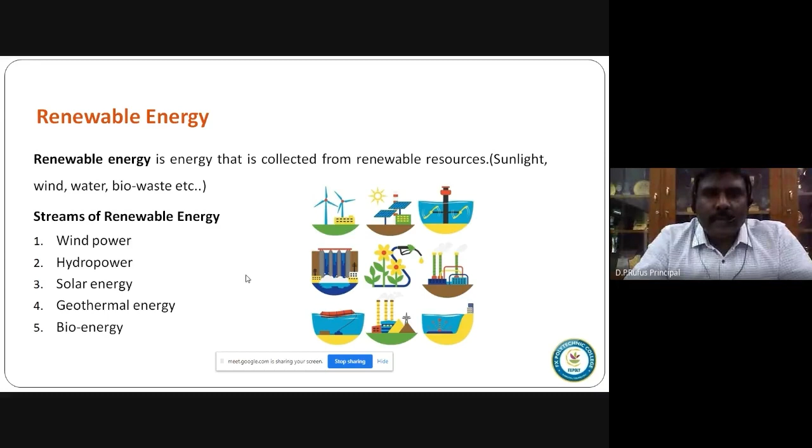Now you may have a question: what is biogas? Biogas is naturally produced from the decomposition of organic waste by the biological breakdown of the organic matter. What are the bio wastes? Food scraps, animal waste, dairy waste, sewage water, and many other wastes. So when we break down the organic matter of the biowaste, we can get the biogas.

So now we can move on to raw biogas. What are the things available in the biogas? Number one, 55 to 65 percent methane. You can find 55 to 65 percent methane in the raw biogas, and also 30 to 45 percent carbon dioxide, and also some traces of hydrogen sulfide and some fractions of water vapor. Pure methane has a calorific value of 9,100 kilocalories per cubic meter. So this is the biogas, and now the uses of biogas.

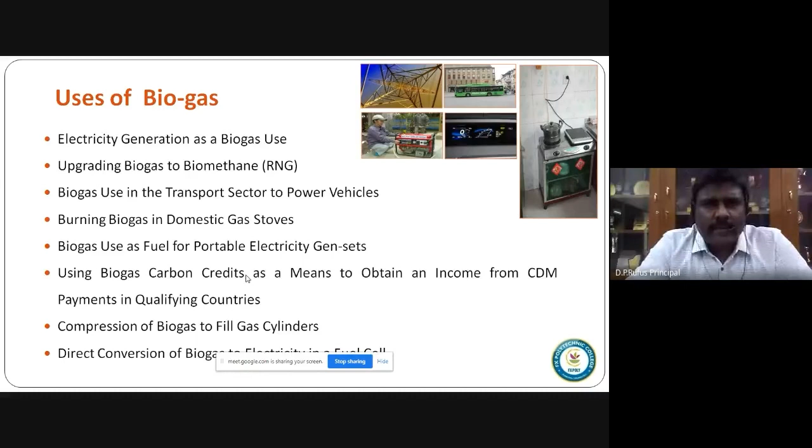Why is this biogas needed now? The world is meeting an energy crisis. Every day the energy need is going high, so this biogas is needed. And also I am furnishing some advantages and some uses of biogas.

This biogas reduces the pollution. This biogas reduces the time wastage while collecting firewood, and this biogas reduces the reliance on fossil fuels, lowers the fuel import bill, saves the environment, improves the living standards in rural areas, reduces global warming, produces good quality enriched manure to improve soil fertility, and is an effective and convenient way of sanitary disposal of organic waste, improving the hygienic conditions.

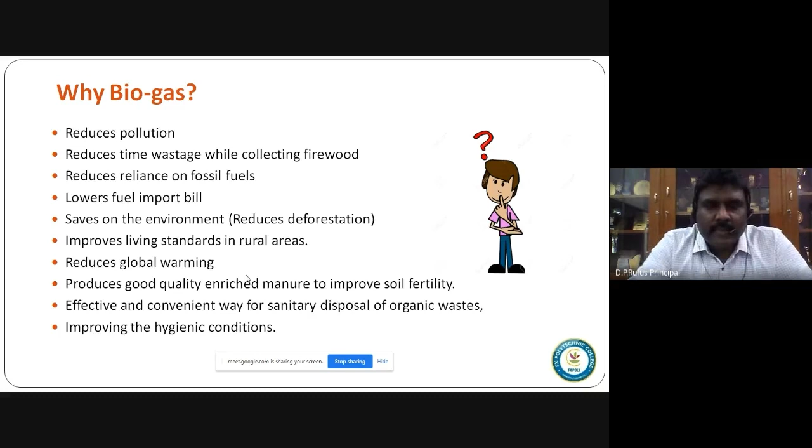So if you use the biogas, these are all the advantages. And also we have some disadvantages. Explosion chances are there, high capital cost, and incorrect handling of liquid sludge causes pollution and requires control and maintenance, it needs proper conditions, and use as a fuel requires removal of carbon dioxide and hydrogen sulfide. So these are all the disadvantages. So high capital cost is required to establish any type of biogas plant.

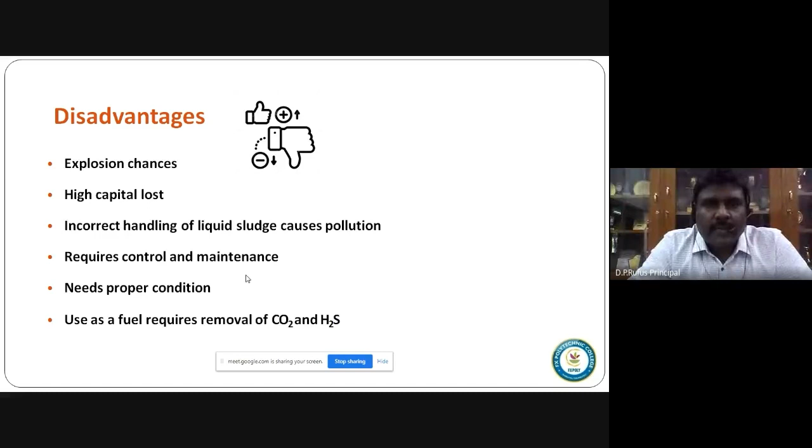So India has installed 12.34 million small scale biogas plants. Also, India is producing 4,946 megawatt from biomass connected to the grid, and 994 megawatt off-grid power plants are also there. So total biogas production in India is 2.07 billion cubic meters per year. But this is quite low, because our estimated range is 29 to 48 billion cubic meters per year.

India can produce 16,800 megawatt from agro, 5,000 megawatt from bagasse cogeneration, and 2,700 megawatt energy from the other resources. India can, but India is only producing 2.0 billion cubic meters per year.

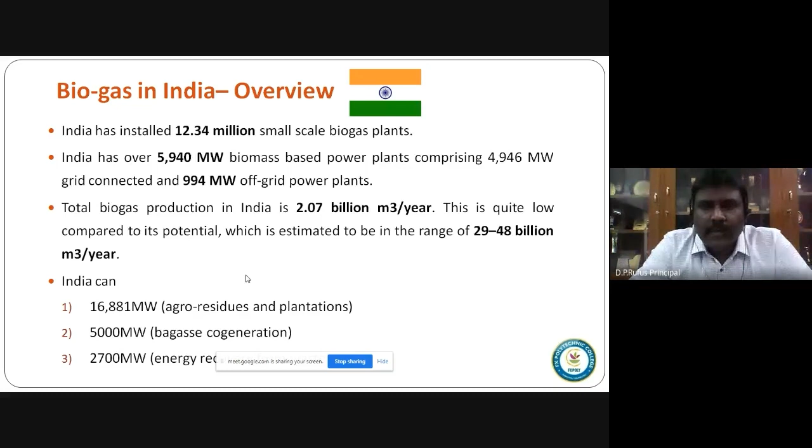So let us move on to the dairy industry in India. My research area is in dairy waste, how to collect energy from the dairy waste, so I'm moving on to the dairy industry in India. In India, the dairy market reached the value of 10,527 billion in the year 2019.

More than 10 million dairy farmers are there, 96,000 local dairy cooperatives are there, and 170 dairy manufacturers and producers are there. The dairy industry is contributing 6.5 lakh crores to the national economy. Every year, the growth rate is 5%. And also, this dairy industry is contributing 20% to the total agriculture GDP. The dairy industry is contributing more than paddy and wheat.

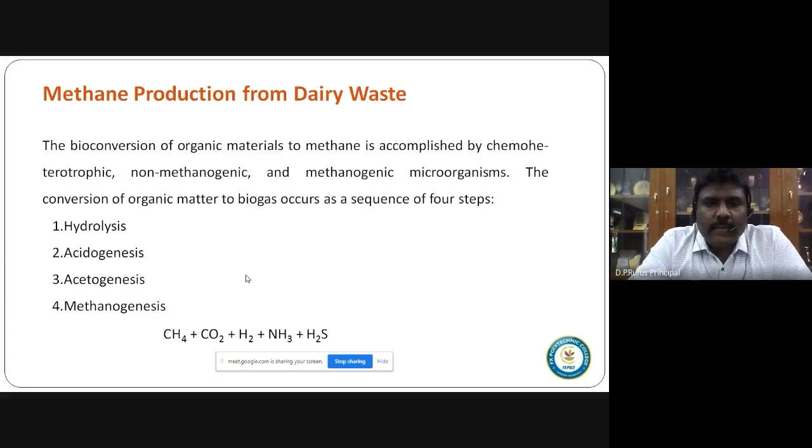So I would like to explain a few words about anaerobic digestion. This is a series process. Before the anaerobic digestion, we can go for some pre-treatments also. Why this pre-treatment? Pre-treatment is to solubilize the raw sludge. If you solubilize the raw sludge, we can easily digest the sludge and get the methane in a faster way. So in anaerobic digestion there are 4 processes, as I said earlier: hydrolysis, acidogenesis, acetogenesis and methanogenesis. These 4 processes are happening in anaerobic digestion.

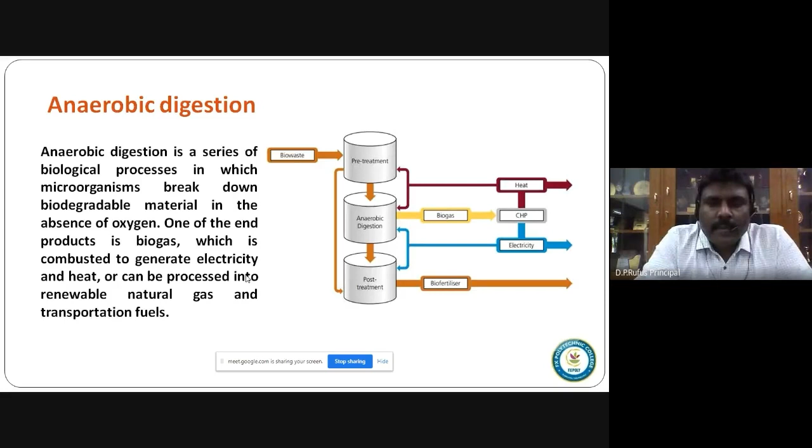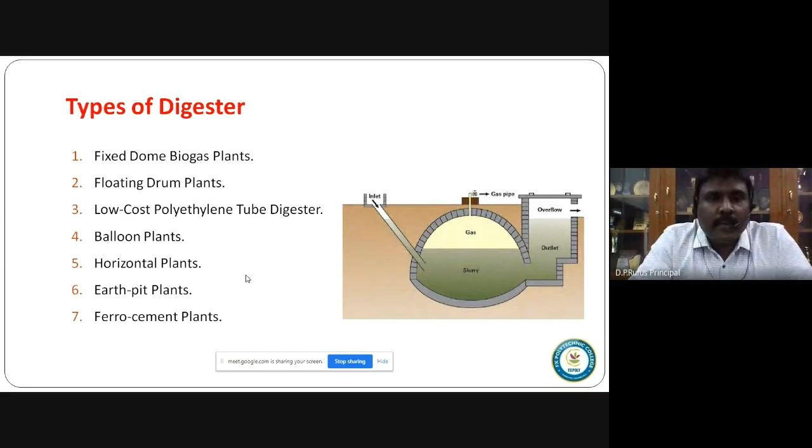There are so many types of digesters also. I have furnished some digester types: fixed dome biogas plants, the common biogas plants used all over the world, and floating drum plants. Low cost polythene tube digesters, balloon plants, horizontal plants, earth pit plants, and ferrocement plants are there. So there are so many digesters. So let us move on to the process, how the methane is coming out from the dairy waste. The first process is the hydrolysis.

The hydrolysis step is to degrade both soluble and insoluble organic material such as lipids, proteins, polysaccharides into soluble organic substances. The hydrolysis process is mainly used to dilute or solubilize the wastewater coming from the dairy waste.

The second process is acidogenesis. The substances formed during hydrolysis are further split during acidogenesis, the second step. Volatile fatty acids, VFA, are generated by the acidogenic bacteria, as well as NH3, CO2 and H2S, hydrogen sulfide, carbon dioxide, and other intermediate compounds. We are removing these in the acidogenesis process.

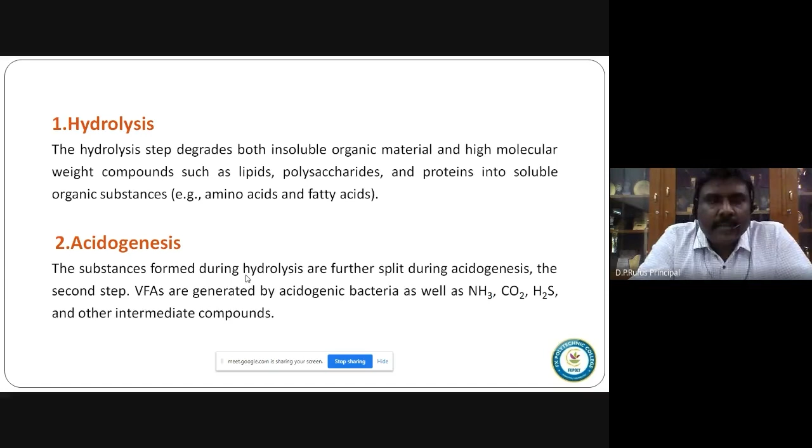The third step is acetogenesis. In this phase, higher organic acids and other substances formed by acidogenesis are further digested by the acetogens to produce mainly acetic acid, carbon dioxide and hydrogen.

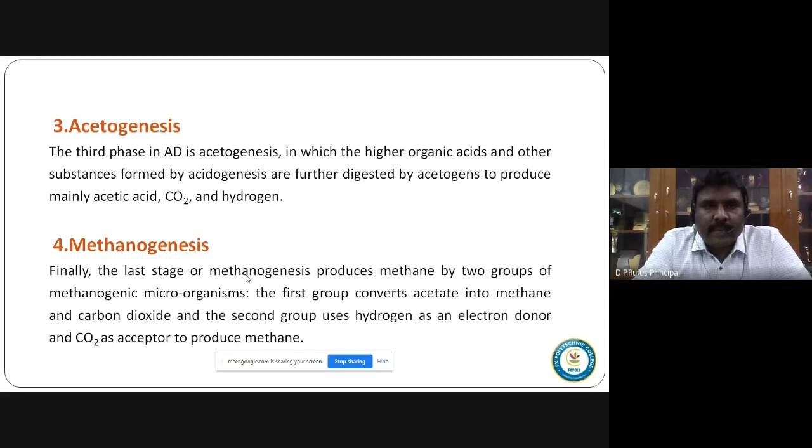Next is methanogenesis, finally the last stage. This stage is very important. Methane is produced by two groups of methanogenic microorganisms. The first group converts acetate into methane and carbon dioxide, and the second group uses hydrogen as an electron donor and carbon dioxide as an acceptor to produce methane. These are the four steps involved in the anaerobic digester.

So see the general features of biogas. This biogas contains 6 to 6.5 kilowatt hours per meter cube, and some fuel equivalents are there. Explosion limits are 6 to 12% biogas in the air. The ignition temperature is 650 to 750 degrees Celsius, and its smell is like bad egg. These are the general features of biogas.

So, what are the factors affecting the production of biogas? In any type of production, there are some factors, some problems, some hitches. Like that, biogas production from dairy waste also has some hitches: the quantity and nature of organic matter is very important, temperature, acidity and alkalinity of substrate, and the flow and dilution of material. These are the four main factors affecting the production of biogas.

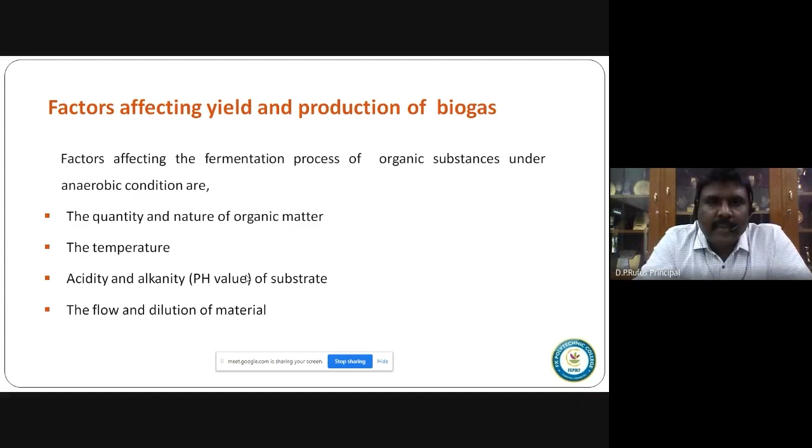So we need proper pre-treatment. If you treat any type of wastewater or waste activated sludge, we need proper pre-treatment to produce the biogas. If you treat it properly, we can avoid these factors and improve the yield of biogas. If you treat the dairy waste, the purpose of the pre-treatment is to remove most of the non-soluble solids physically in order to produce methane.

So see the advantages. With pre-treatment, the performance of digestion is high, it hastens the decomposition of sludge matter, increases biogas generation, excludes pathogens, reduces specific sludge production, lessens bulking and foam formation, enhances dewatering and settling properties, enhances degradability of complicated substances and industrial remains, gives rapid digestion, enhanced solid reduction, and elevated residual stability. These are the advantages of pre-treating dairy wastewater.

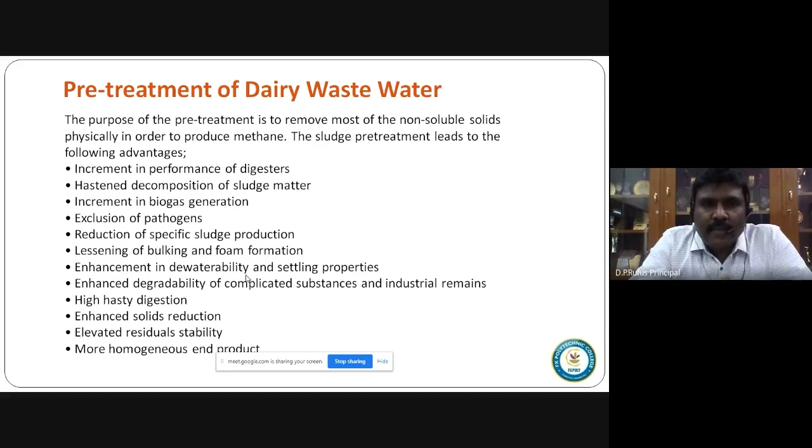We can also pre-treat the sludge by combining two pre-treatment processes. We can use physical and chemical, physical and biological, or chemical and biological. So we can use a combined process also.

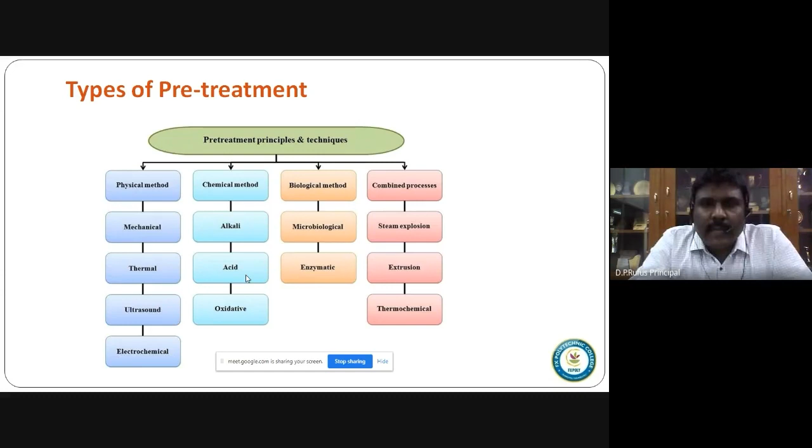Number one, mechanical pre-treatment enhances the digestion performance, including elevated biogas generation. The main approach is to disrupt microbial cell walls in the waste activated sludge and allow degradable materials to release outside their cells, an important mechanism in the hydrolysis phase of digestion. During this process, we are breaking the microbial cells by mechanical pre-treatment.

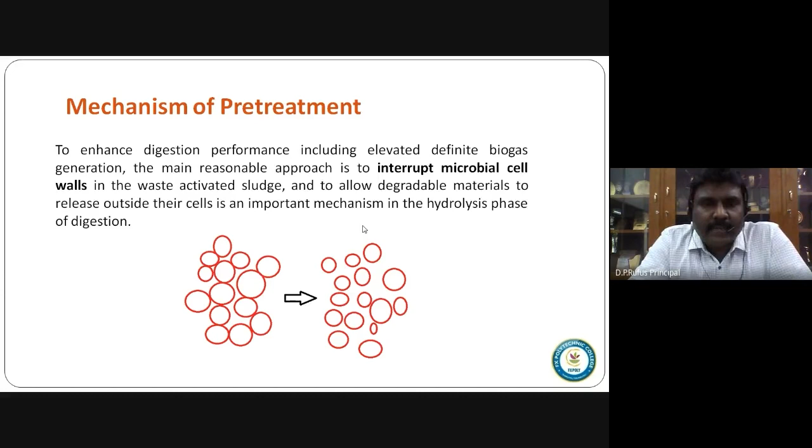What is the physical pre-treatment? There are many types. Number one is thermal pre-treatment. It is nothing but heating the waste activated sludge. Here there are two types: high thermal pre-treatment and low thermal treatment. If you heat up to 70 degrees Celsius, this is the low thermal treatment.

If you heat the waste activated sludge up to 170 degrees Celsius, that is the high thermal pre-treatment. The thermal energy employed during heat pre-treatment disturbs the chemical bonds of the cell wall and the cellular covering, thus releasing the cellular materials into the aqueous portion.

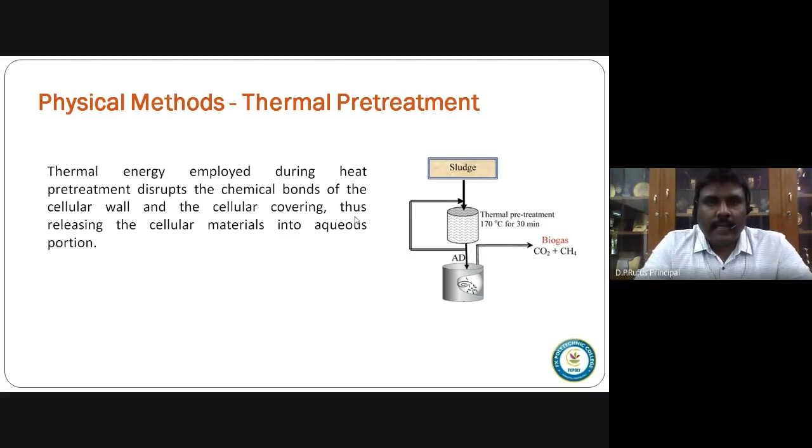Okay. Now, second one is microwave pre-treatment. The thermal effect is created by the impact of fluctuating electrical field with the dipolar compounds like hydrogen sulfide, proteins, fats, and other complex molecules. What will happen in this microwave pretreatment? It will rupture the hydrogen bonds, and consequently the disintegration process is started. The cells start breaking in this microwave pretreatment, and researchers have reported about 50% increment in biogas production of microwave pretreated sludge.

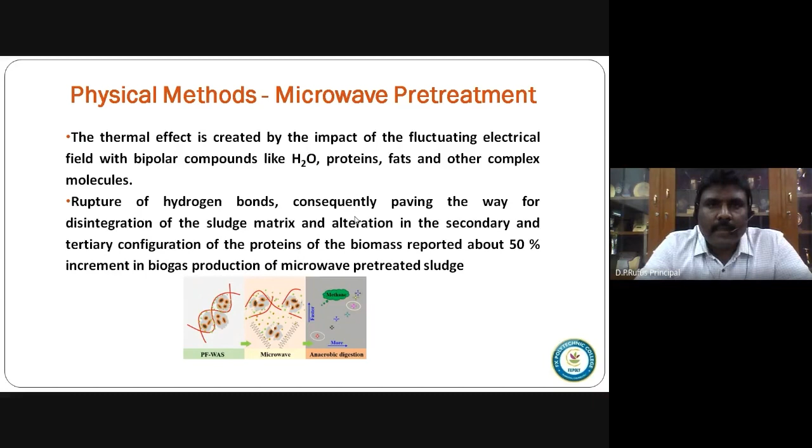And chemical pretreatment. In this chemical pretreatment, alkaline pretreatment is there, and we can use alkali agents, NaOH, KOH, and some other alkalis. If you add the alkali, what will happen? Rupturing of the sludge biomass cell wall and the membrane is started. Automatically, this disintegration process is started. So this process is very easy. This process is less cost. It also helps the biogas production.

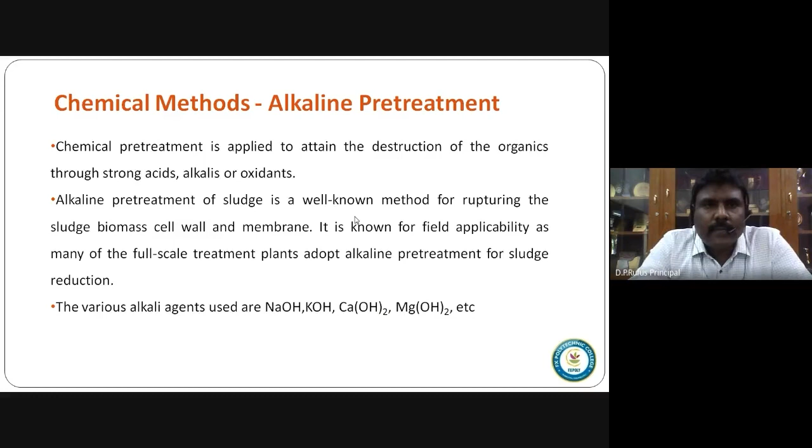And mechanical method. Number one is ultrasonic pretreatment. In this ultrasonic pretreatment, it is used to enhance the biodegradability, liquefaction, disintegration of biomass, reduction of solids, and decrements in floc size. Ultrasound, when passing across the medium, creates a stress emission that permeates through the particles and produces gas and vapor bubbles. As a result, cavitation occurs. Elevated shear stresses are generated and react on the materials in the medium, which is primarily accountable for sludge disintegration. The cells start disintegrating in this ultrasonic pretreatment.

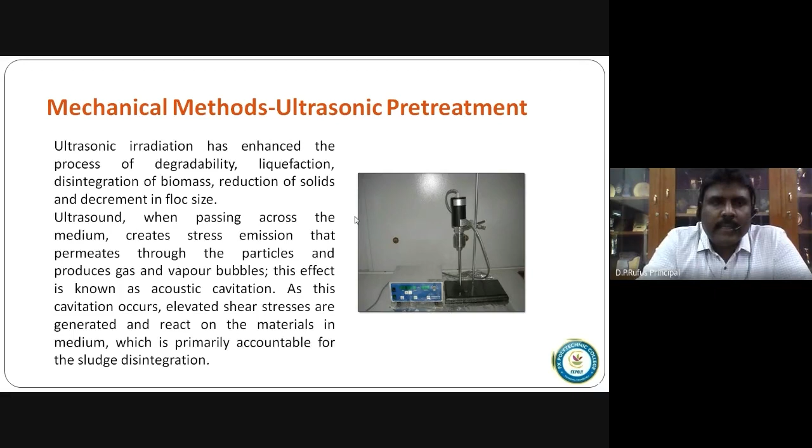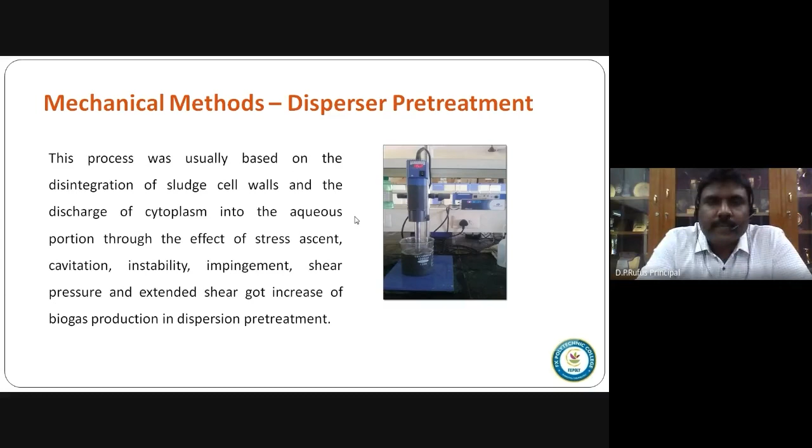And let us move on to the disperser treatment. Disperser is nothing but allowing the rotator to rotate inside the waste water. This process is usually based on the disintegration of sludge cell walls and cytoplasm into the aqueous portion through the effect of stress, cavitation, instability, impingement, shear pressure, and extended shear, giving an increase of biogas production in dispersion pretreatment. This is like an agitator.

And biological method, there are so many biological methods. Bacillus licheniformis is added, and it will break the cellular walls automatically. If you break the walls, we can liquefy the waste activated sludge easily. The bacterial pre-treatment along with the anaerobic digestion yielded 53 to 57 percentage increment of methane in the biogas production.

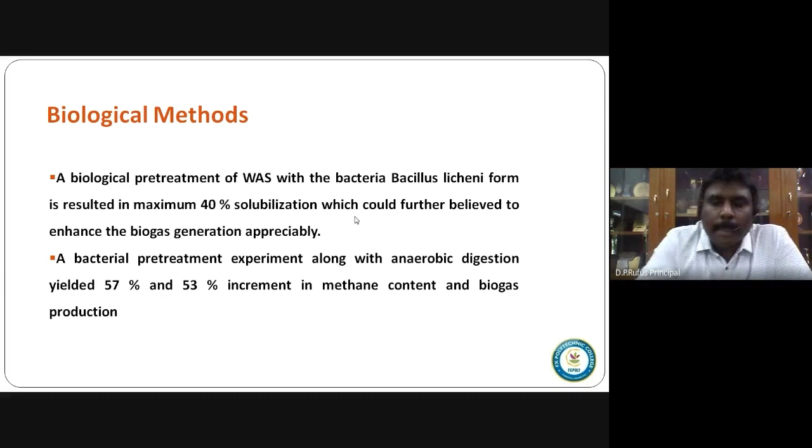So, see this picture. These are the advantages of various pre-treatment methods. Many researchers have done the work. I have plotted physical, combined, chemical and biological pre-treatment methods, how much biogas production has been increased, and how much COD solubilization has been increased. I have just plotted it for your information. So this biogas production will play the major role and will give more electricity, more energy, and also more employment in future. Thank you.